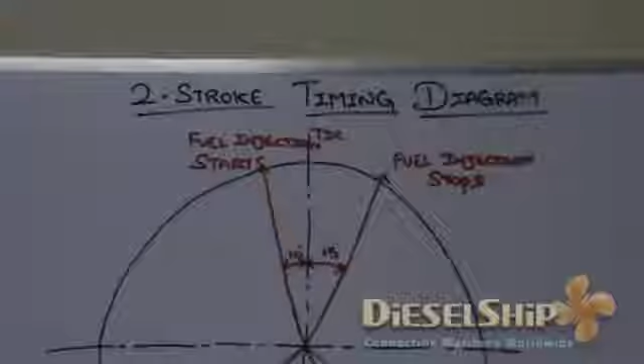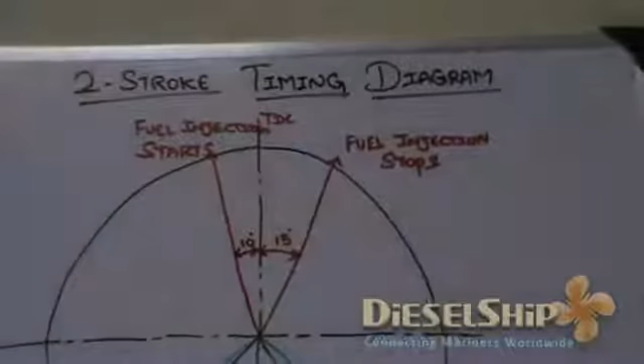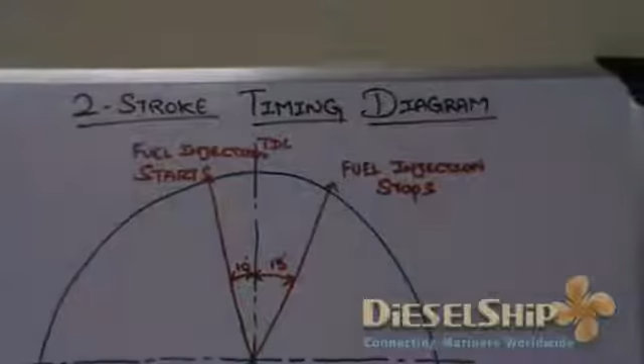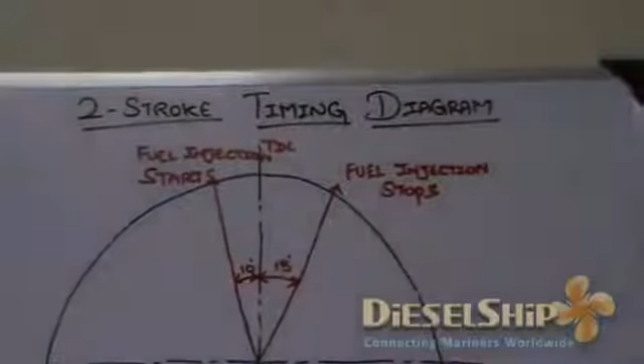This is a simple timing diagram for a two-stroke cross-head marine diesel engine. With this diagram we're going to understand why the exhaust valve cam need not be reversed. We all know that the exhaust valve timing is not altered in a MAN B&W MC engine. The reason is that the exhaust valve timing, as you see from this timing diagram, is symmetric about BDC. Let's see how.

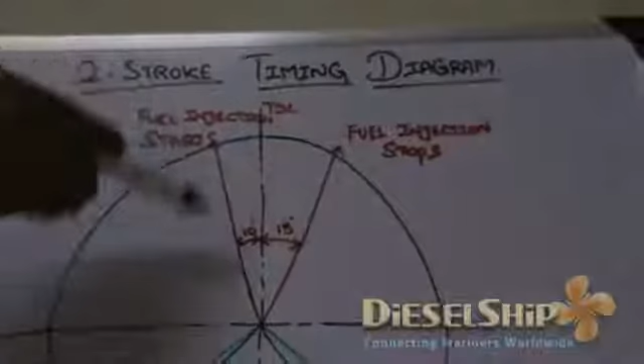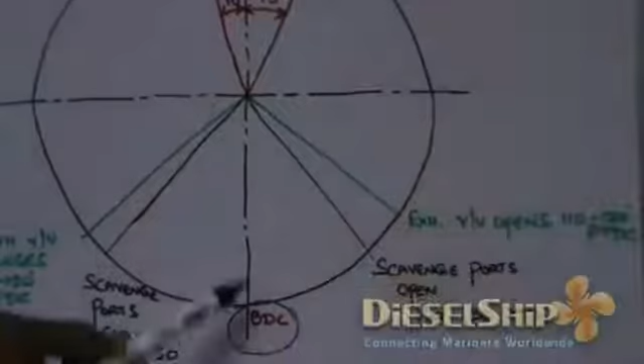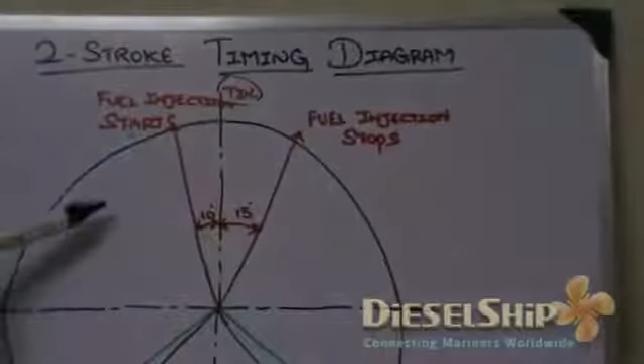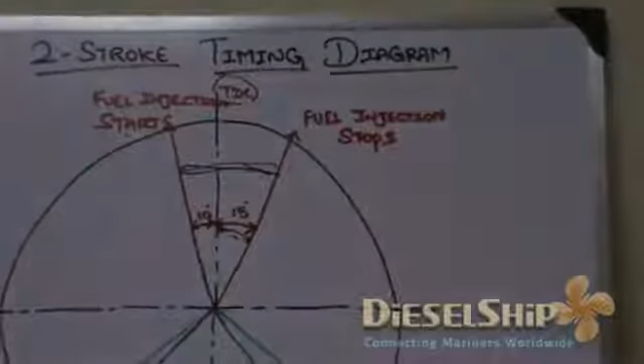Here is the simple timing diagram. This is the TDC and here is the BDC, the top and bottom dead center. Now let's start with the fuel injection. 10 degrees before TDC the fuel injection starts and combustion takes place in this area, and the fuel injection stops 15 degrees after TDC. After that the piston travels from TDC towards BDC.

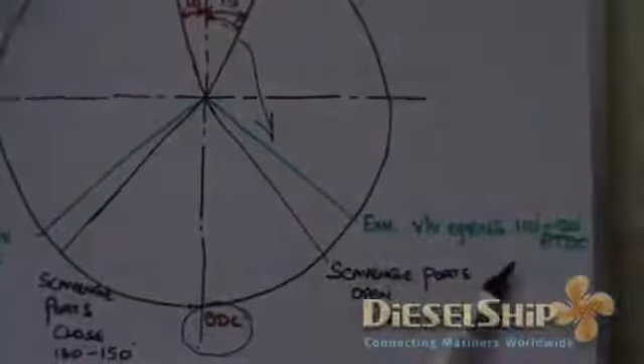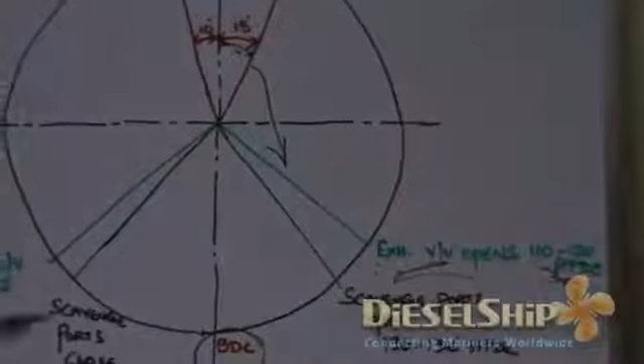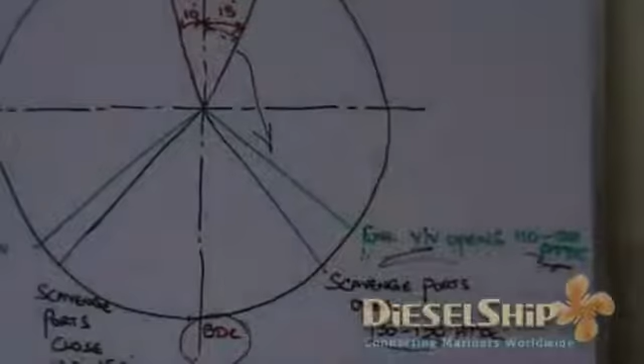Approximately at 110 to 120 degrees after TDC the exhaust valve opens. The important point here is the exhaust valve should open before the scavenge ports uncover. So in the latest engines, the approximate timing is 110 to 120 degrees after TDC the exhaust valve opens, and then the scavenge ports uncover as the piston goes down. This timing is approximately 130 to 150 degrees after TDC, and then the piston goes to BDC.

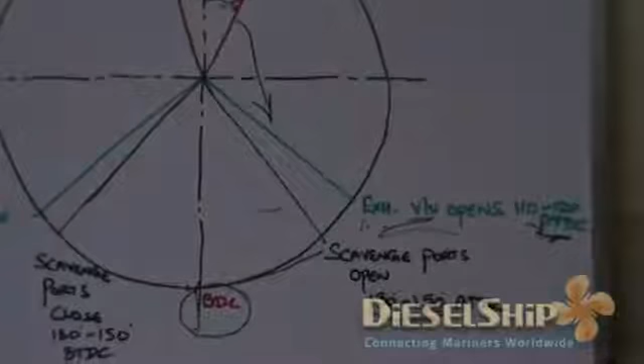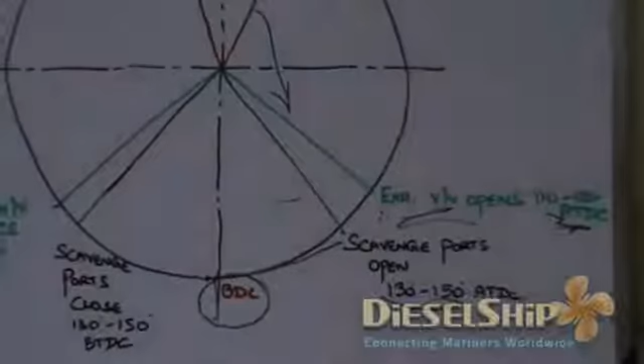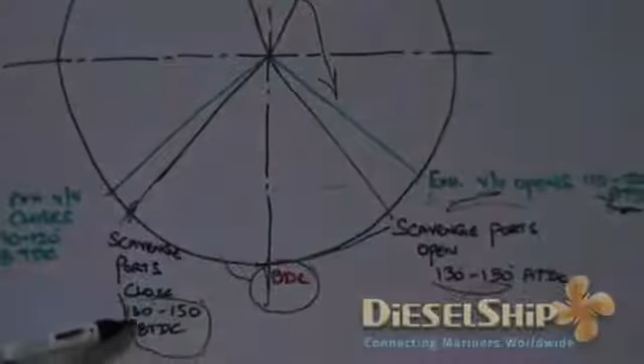At this point the scavenge air, if it's a uniflow scavenging, pushes the exhaust gas out through the exhaust valve and the exhaust manifold, and fresh air occupies the combustion chamber. Now as the piston ascends up towards TDC, the scavenge ports first close approximately 130 to 150 degrees before TDC. We are now traveling from BDC to TDC.

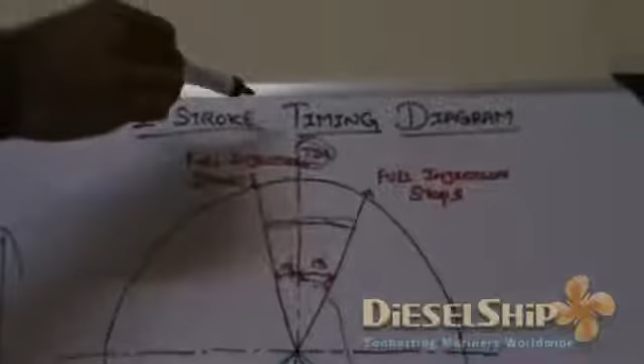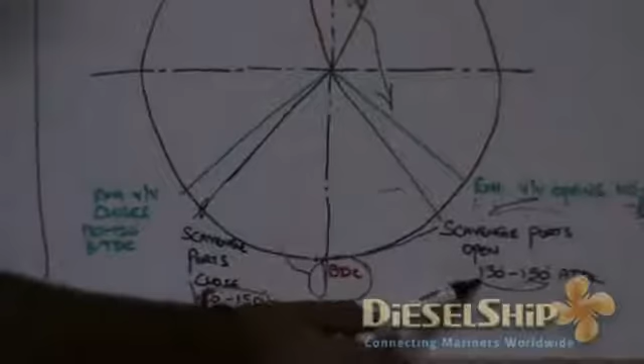I always take a reference to mention the crank angle around TDC. So the scavenge ports close approximately 130 to 150 degrees before TDC. If you look at the other side, the scavenge ports open 130 to 150 degrees after TDC. These two angles cannot be altered, since the scavenge port position cannot be altered. It is fixed, so the timing cannot be altered.

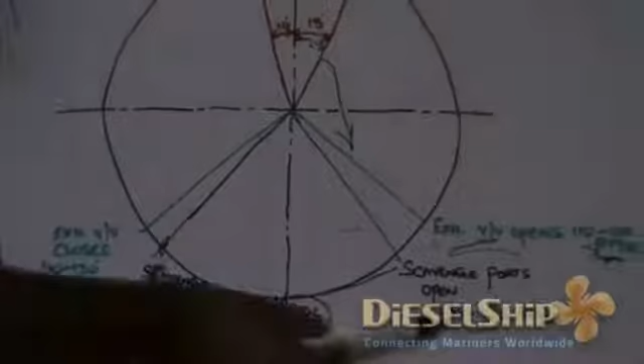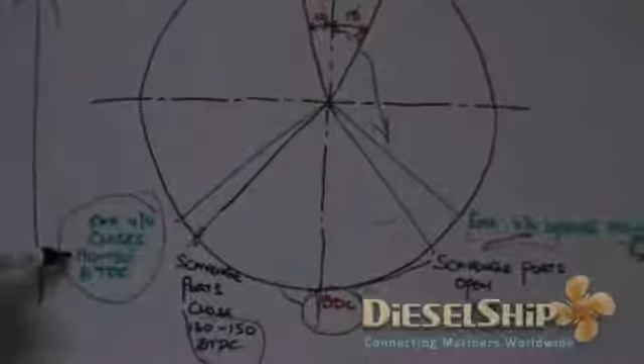When we come to the exhaust valve, as the piston slides up towards TDC, the exhaust valve closes, approximately 110 to 120 degrees before TDC. So for an ideal two-stroke cross-head engine, the timing diagram shows that the exhaust valve opening timing and the exhaust valve closing timing are almost symmetric about BDC.

So when we reverse an engine, we don't have to alter the exhaust valve timing. This is a typical exhaust valve cam model. What you see here is the cam base circle, here is the peak, and here is the flank. Let's draw the axis through the center.

With respect to this axis, the rise and the dwell of the cam is symmetric. The amount of rise and amount of fall here is symmetric and exactly equal. So if you reverse the engine for the fuel, you need not reverse the exhaust cam.

Let's see how. Assume for ahead direction the engine is rotating this way, and you have a roller on top like this. The roller is here and the exhaust valve cam should rotate here. Let's say at this position I stop the engine, and the exhaust valve has opened fully. If the roller is here, the exhaust valve has opened fully, and now it's starting to close at this position when the engine is running in ahead direction.

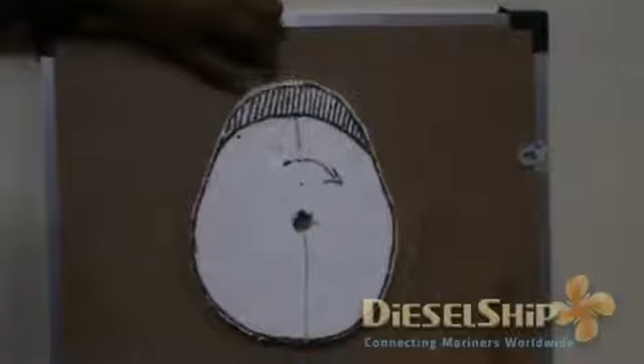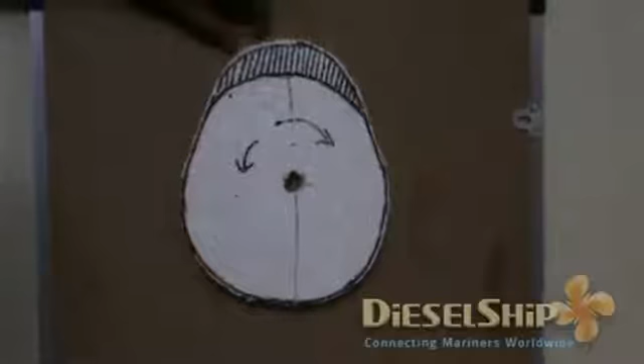Now I'm going to reverse the engine. The distributor and the fuel cam have reversed, but the exhaust cam has not reversed. Let's see what happens if I start the engine in astern direction, this way. Since the distributor and the fuel cam have reversed, the engine can be started.

Once the air kick is given, the engine starts to rotate. So in the astern direction, when this starts to rotate, the exhaust valve has not opened fully, it is just on its way to open fully. So when this cam rotates anti-clockwise, the roller slowly goes to the peak and the exhaust valve opens fully and then slides off the dwell of the cam.

So there is no big difference between the ahead direction and astern direction. Once again, if this is the roller, if the cam is assumed to turn ahead, the roller has crossed the peak, meaning the exhaust valve has opened fully and is starting to close. But when I start to rotate in astern direction, it is just opened and has not opened fully, meaning there is no big difference in the exhaust valve cam timing when the engine is reversed.

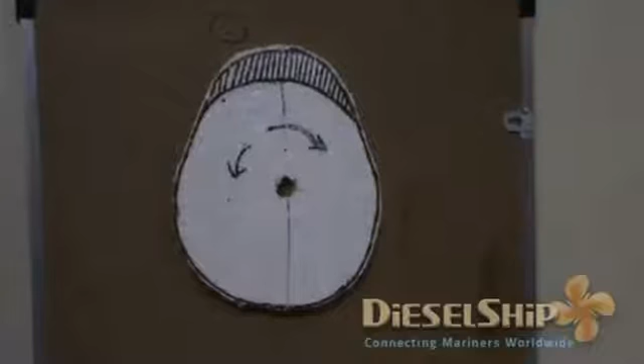It is for this reason the cam is made symmetric about the axis, and the exhaust valve cam timing adjustment is not carried out during reversing. It all depends on the engine type, but this particular explanation holds good for MAN B&W MC engines.